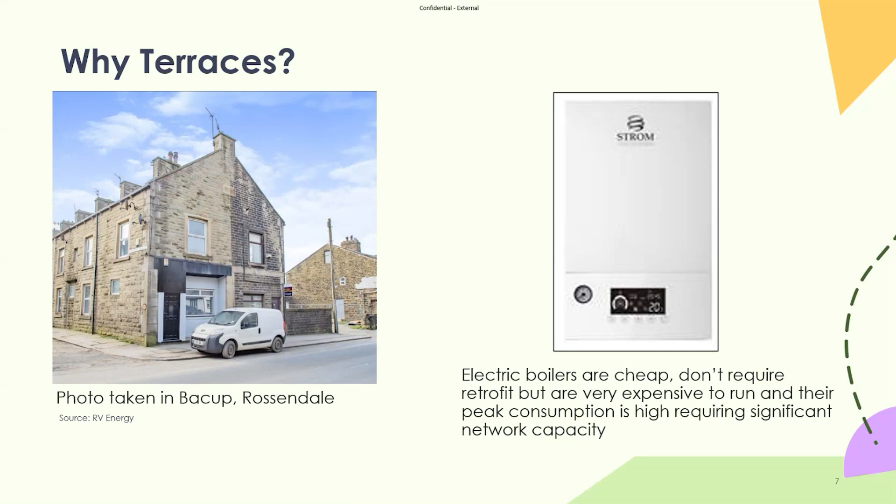So that's where we are, and this is what I was saying: the no upfront cost, the fabric retrofit, the low carbon heat solution, and then the power that sits behind that. How do we get the electrons moving into these properties in a sustainable and in a fair way?

So we built this diagram out of those four principles, and when we came across something that didn't quite work or didn't quite align, we went back to that black box and started again and kept working out how this system would work in a way that keeps to those principles. And we're well on the way with that at the moment. So where did we get to?

So we've identified the issue that we've got with a lot of these properties across the country. We did a big feasibility study with Buro Happold through the Strategic Innovation Fund's Discovery and Alpha in partnership with Electricity North West, our local DNO, to work out what is feasible and what's not for this area within Rossendale, with the idea that it could be applicable to every terrace property in the UK.

So in a nutshell, we came up with a system of ambient ground source heat pumps that would sit underneath the terraces, taking inspiration from social housing. And one partner I neglected to mention at the beginning is Kensa, who do a lot of social housing work with ground source around tower blocks. And our director likes to say terraces are essentially tower blocks on their side, which made sense to me: there are lots of properties in a row, so why not translate that across to them?

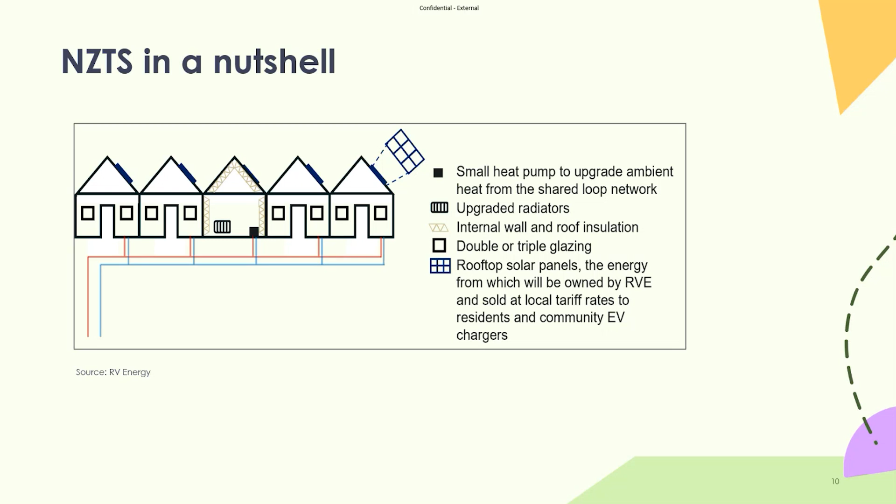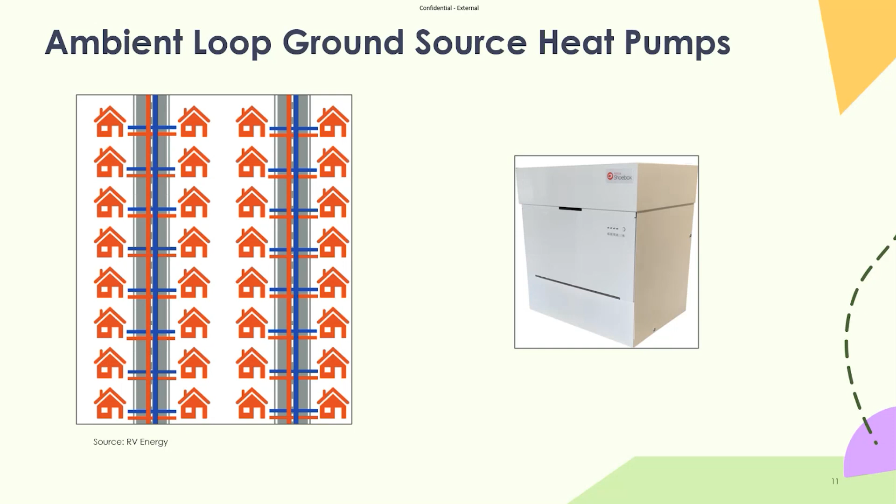So essentially, that's a picture of the shoebox, and it is a misnomer. It's not actually the size of a shoebox. It is still quite large, but it's not as big as most ground source heat pumps or internal heat pumps, water to water ones. And essentially, that's a little diagram of how it works. We'd be looking down the street, and then we'd stick boreholes where we can get them in amongst existing utilities and infrastructure, and connect houses up as and when.

Fabric upgrades, as I've said, this list isn't necessarily exhaustive, and it's not necessarily going to be applicable to every property. So ideally, we wouldn't want to be putting internal wall insulation in these properties because there's not a lot of room in there anyway. But even the notion of upgrading the radiators to being slightly bigger is one that might push rooms to just feel a little bit on the small side.

So if we can get away without it. And again, external wall insulation: for the properties that we're doing at the moment, those back-to-backs that we saw just a few slides ago, the red border is essentially on their front doorstep. So if you put anything externally on that property, you'll have to go to planning and see whether we can do that. And we did have a look as part of the work we were doing on this project, and it was a nightmare to try and figure out. And again, as you saw, those properties are very nice looking properties. They're in keeping with the local aesthetic, and from a heritage point of view, it more than likely will be hit with some backlash.

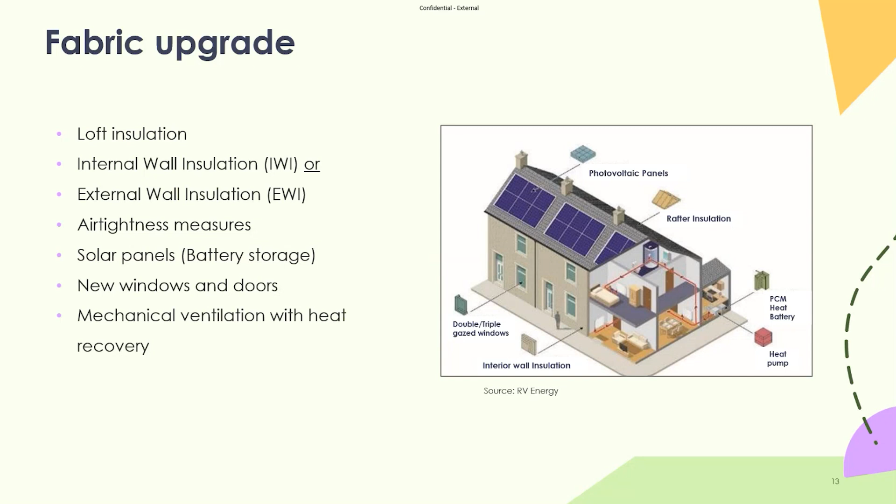And there are systems that you can get that essentially are really nice. They've done them in places like Durham and I can't remember where else, but they're really pretty and really nice. But they also come with a pretty hefty price tag to get them looking like that. So all of these things are kind of balanced out, and it's all in that notion of getting the heat load to where it needs to be within the property. So it'll be a mixture of these measures that will go in.

And as I mentioned, the solar panels where we can get them, and batteries. Again, these properties don't always have a lot of space within them, so batteries may not be an option, but where they are, we could stick them on. Again, we come up with a planning problem, but on the ends of terraces we can have community batteries that will power and distribute through the system.

But essentially, we're working on a network innovation allowance project now with Electricity Northwest to look at a smart local energy system and what that looks like on that local level, and it will sit between the home energy management system within the properties and the grid, so that we can balance and aggregate at that local level. So essentially, that is the project, the bones of it. And I will pass over to Phoebe now, who will bring you through Fairer Warmth and the customer journey and that part of it.

Thanks, Andy. Hi, everyone. So I'm Phoebe from the Centre for Energy Equality. Andy's been talking through what Net Zero Terrace Street is and the technical concept. And we at CEE have been developing our Fairer Warmth system to be the digital spine and actually enable this process, because as we know, retrofit is very complicated and we need to try and make this as efficient and joined up as possible. So part of this is developing our Fairer Warmth system.

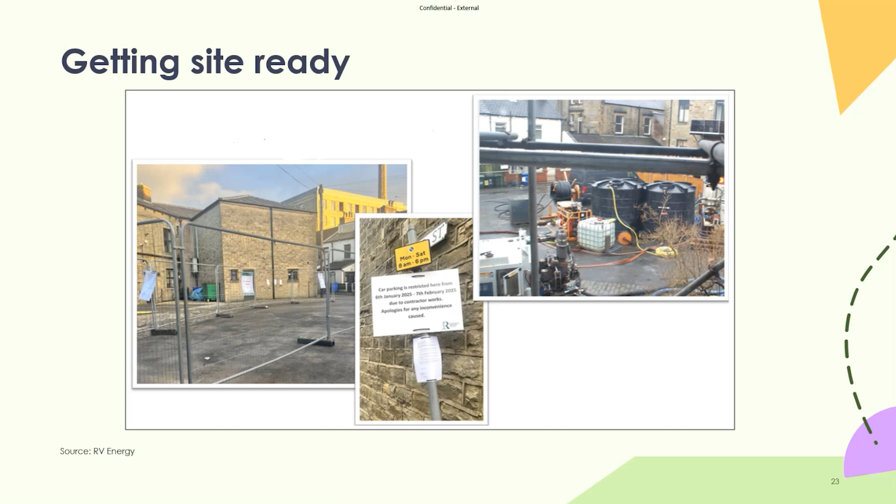But essentially, for the ground source array that goes underneath, there's a lot of kit that goes with that, and you can see that in the car park there. There's 2 big water drums that essentially flow and return water. They've got pumps and all sorts of kit that needs to sit by it. So while they were getting all this sorted, we went to the properties and had a look at the roofs, got them ready for solar. And when they were up there, they decided that the roofs did indeed need completely re-roofing. So that added a little bit of time, but we put everything up and started on that simultaneously with the drilling.

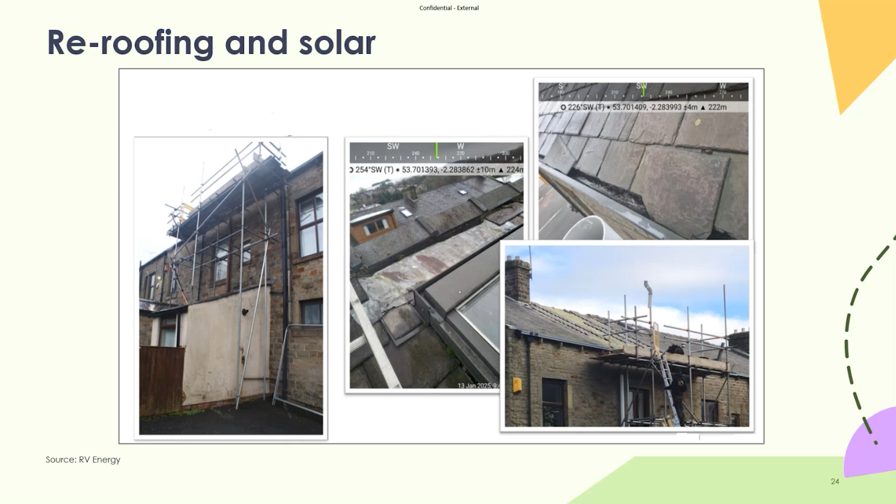A few pictures of the site and the boreholes for the ground source being drilled. I did initially have a video in here, but it was somewhat deafening with the sound on, and it was not particularly great without the sound. But essentially, it wasn't as loud as I thought it would be. The compressor and the pump that sat behind it, constantly flowing water to it, was seemingly louder than the actual drilling, and there was very little vibration coming off this.

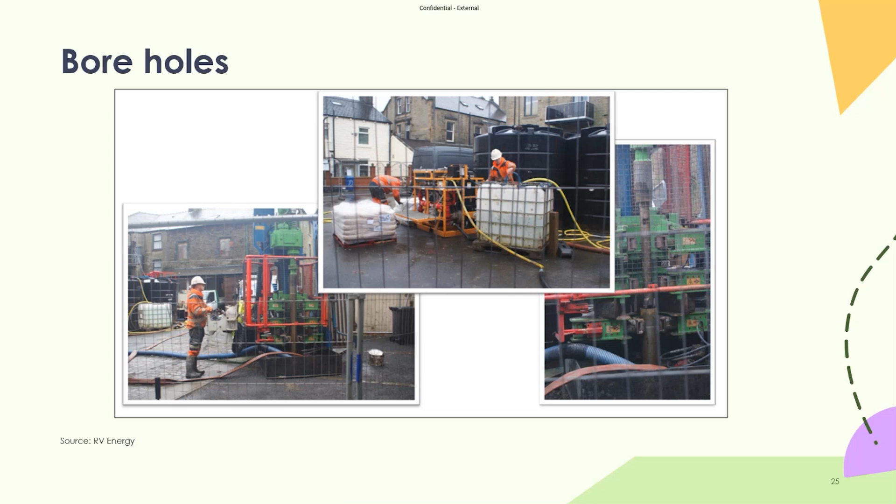And for these properties, we drilled 2 holes, one to 102 meters and the second one to 122 meters, and they're sitting just within the area behind these properties. Inside, while that drilling outside was being done, and when it had finished, we started on the fabric retrofit measures. We're a lot further on than this now, and I do need to update these, but essentially this was the process of us running through the room in roof and what was spec'd.

Working down, we have a lot of air tightness measures. We managed to get away with these properties not having internal wall insulation, so there's a lot of air tightness measures. The decentralized mechanical heat recovery ventilation went in here. New windows and doors were put on, with the window reveals insulated as well. And then these properties have basements.

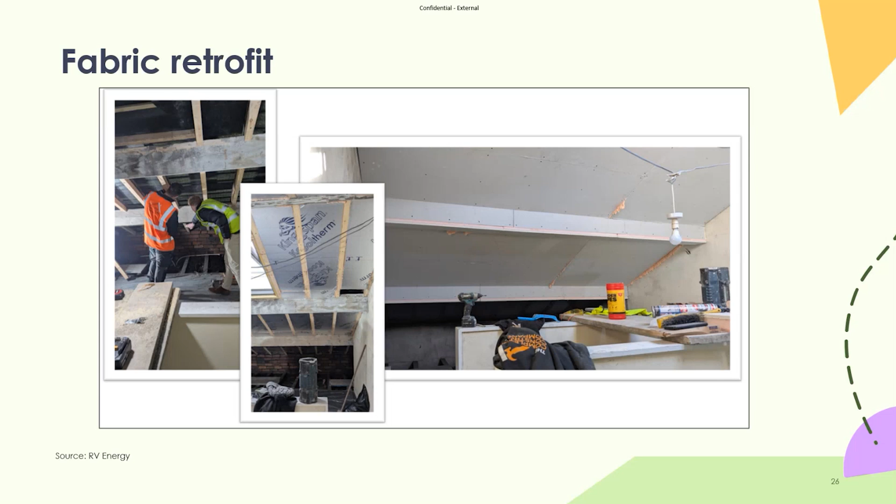So we are testing in one of them a moisture resistant membrane that sits on the floorboards, and in the second property in this terrace, we've got insulation that sits between them as well, and we're going to see what the difference is, as to whether it's needed or not in terms of how efficiently the heat pump's running.

Throughout all of this, right from the beginning of selecting these properties, we've had a vast number of sensors and monitors within the property. So we're looking at air changes per hour, temperature, humidity. We've got relative humidity and temperature sensors outside the property as well, so we're looking at both at the same time. We've installed dehumidifiers that are pulling out moisture in places where we identified it was quite damp, so that we're taking all this learning in.

So eventually, when the heat pump's finally installed and running, and we've got some cold weather so we can turn it on and see how it's going, we can make those comparisons and see how much we're saving and how well the system's performing. And this thread will pull through the entirety of what we're doing. So for the purposes of demonstration, this is great.

The monitoring, we're hoping, will continue throughout the project and further iterations of this, so that we can go back. Like Phoebe said, we've got energy champions that will sit alongside this and support people through the journey of getting it installed. The idea is that they will stay somewhat in perpetuity and be able to support people and see on a Fair Warmth dashboard that, I don't know, Mrs.

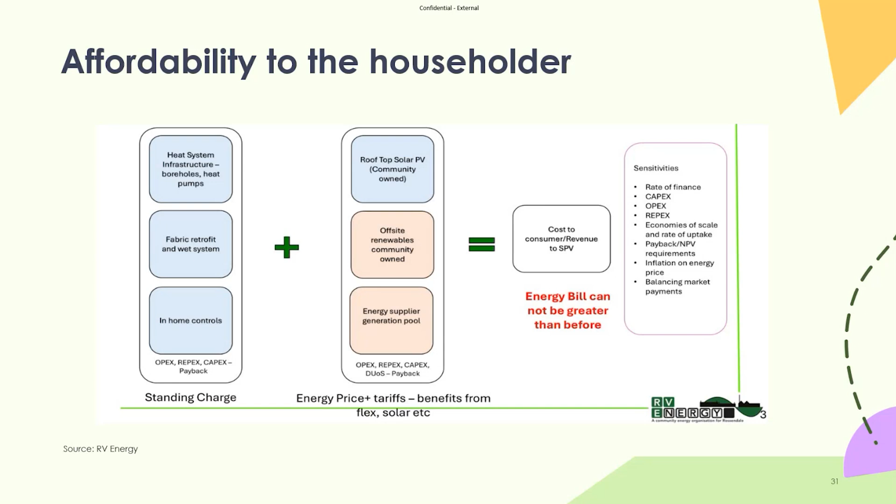But again, the customer is at the focal point of this. And if we can't build something that's affordable, then we need to go back and find something within the project that essentially pulls that through, so that we can make it affordable to them without compromising the heat load or the healthiness and warmness of their property.

So we've run through quite a lot, I appreciate, but essentially what we're looking to do is create that whole systems approach for the decarbonisation of terraces. We're not necessarily saying that this is the only route that these terraces have, but a lot of the ones that we've got up north, especially in Rossendale, back to backs, there's very little out there that we can transpose on them at the moment, and new innovations are being pulled through all the time.

Heat batteries and thermal stores and phase change batteries and things like that are coming through and becoming more commercial. And we'll visit that at a point. Looped CIC, that will sit as that singular entity, will continue that work and continue what we're doing at the moment at Rossendale Valley Energy to keep that innovation going.

And if there is something that comes through that might be like, actually, this might work, then we will test it and keep moving, because it's designed to be customer focused. And if we can save people money, and if we can save them hassle and disruption, then we're all for that. I said that we made good progress on our demonstrator properties.

They're looking quite nice, and I do need to update those slides to some nice fancy shiny ones rather than just works being done. But we're pretty much done with two of them, and the third one is well on the way. And again, the techno-economic and financial stuff is pushing along well.

So we currently end this phase of funding that we've got through Innovate UK and DESNZ in November. So we'll have everything hopefully tied up with a little bow on top by then. And then we'll be on to hopefully a bigger pilot scheme where we can keep testing this and keep going and have a look at how we move through the latter stages of techno-economic and financials.